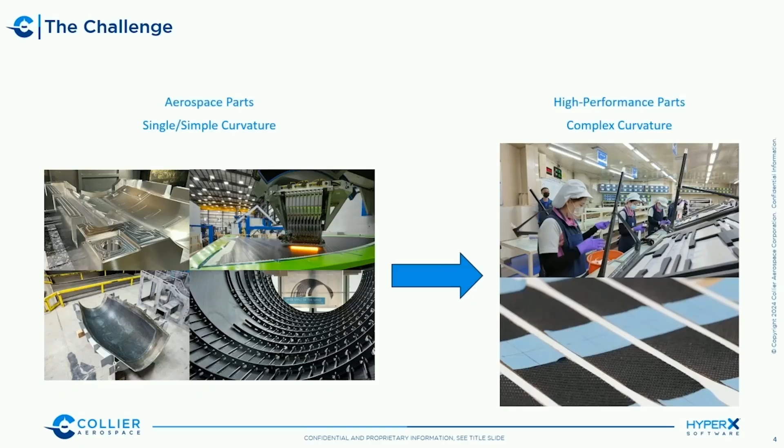Just to lay the groundwork on why we're integrating with manufacturability and maybe some of the differences between aerospace applications. To set the stage, there's a little bit of a difference you might see here between aerospace, where you're dealing with large, comparatively simply curved panels that are all tightly controlled with their layup process, their angles and things like that, versus what you can see on the right in those videos. You've got a lot of hand layup going on. You're using very tight curvatures and very localized stiffeners and strength reinforcements.

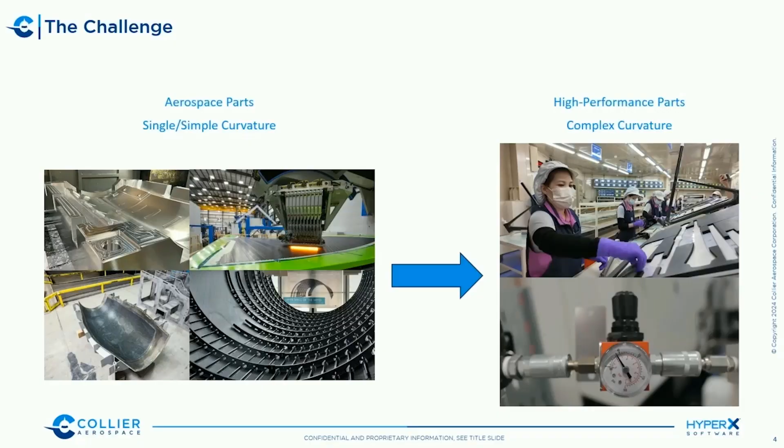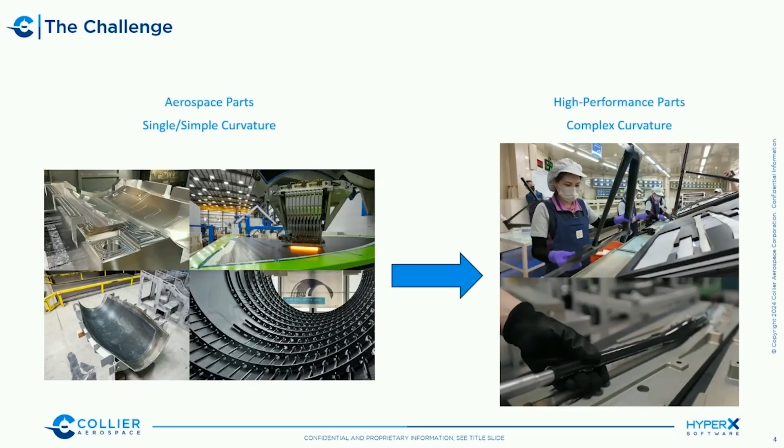So understanding how plies are laid up and how they're positioned over that curvature can affect the performance of that ply pretty significantly, and that's the impetus of incorporating DFM into our analysis workflow. So what I'm going to be focusing on today is how we've been able to leverage HyperX's capabilities and its integration with CAM tools to balance stiffness, strength, and now manufacturability into our optimization workflow to make the best product possible.

So what we are going to be looking into today as the prove-out of this workflow is an integrated bar stem. This is for a road bike, and this has become more ubiquitous in cycling OEMs as they look, one, to reduce part count on bikes, but also to eke out every last gram of aerodynamic drag and weight in a system. So traditionally, they start up on the top right. You can see they're usually two pieces, but that increases overall system complexity, weight, and it's not as aerodynamic.

So they're moving towards what you can see on the bottom, which is a one-piece, what we call a bar stem, which is not without its challenges because it increases overall part complexity from a single standpoint, but it's more efficient from a weight and stiffness perspective.

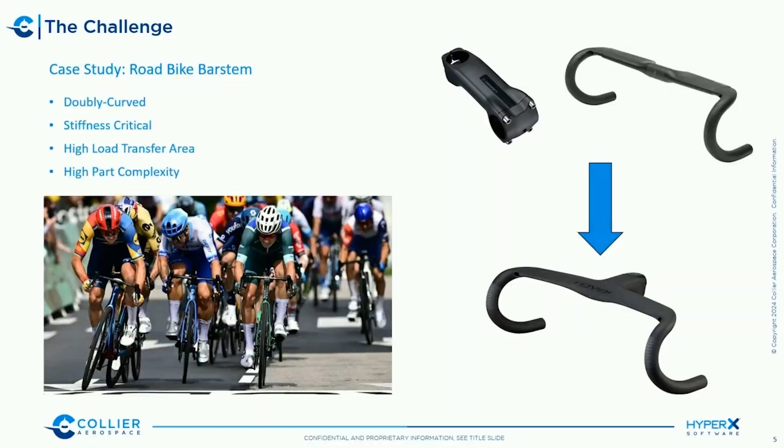A key thing to note here is this is one of the primary contact points for a rider. So from both a load and a stiffness perspective, it can pretty significantly impact their perception of ride handling. You want it to be stiff enough so when they're sprinting at the end of a stage like you see here, or going around a corner at 40 miles an hour, they're not feeling the bike squirm underneath them, but not overly stiff such that their arms and their bodies get fatigued over a full day of racing.

So just to give a high-level overview of some of the non-traditional aerospace applications that we've stretched HyperX's legs in with weight critical or stiffness or highly curved surfaces. You can see on the left, Yvonne showed this yesterday, it's the SP80 sailboat, so a weight critical application with a lot of curved panels that we use to size the hull on.

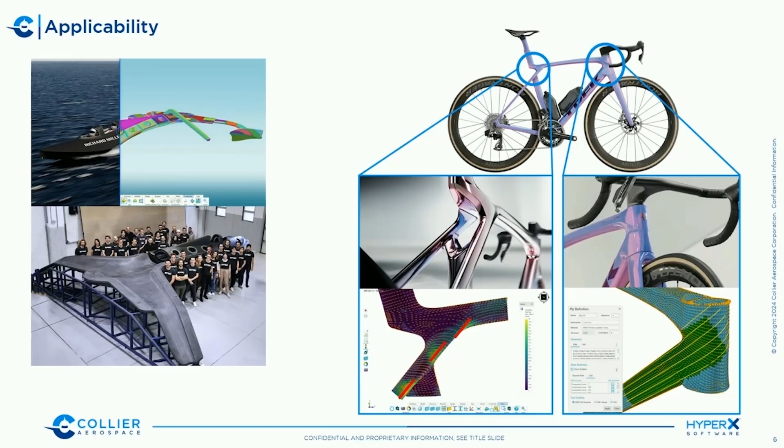And then on the right is the Trek Madone, which you might originally think is just a one stack laminate structure with tubes, but the more you look at it, the more complex it gets. So that's what I'm trying to illustrate there. You can see on the left, there's some instances where we have as many as 7 different tubes joining in an intersection at one point.

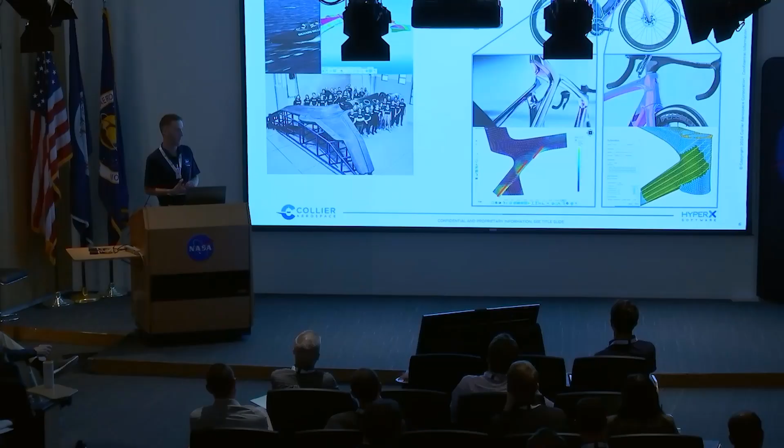Those all have unique fiber reference orientation directions. You might have global plies that span different sections that have different material reference orientations, like you can see on the right. You've got a single ply that spans 2 of those tubes. So you've got to deal with how you resolve those discontinuous material reference orientations, how you deal with drapability and

things like that. So just to show how complex the problem can get and what we're going to be working on. So even though what I'm showing today is just a road bike handlebar, the applicability is that it can be scaled up much more beyond that.

So just to level set where we're at in terms of how sensitive we are to weight. I know a lot of the presentations over the course of the last 2 days, we've been talking about hundreds or even thousands of pounds. And so I did a quick calculation. Like the nose cone, just printing out the 150 pages of stress reports, that's probably about the weight of a bike frame. So we're about 500 to 1,000 grams. So in this case, taking out increments of paper clips is a big deal of weight to take out of this structure.

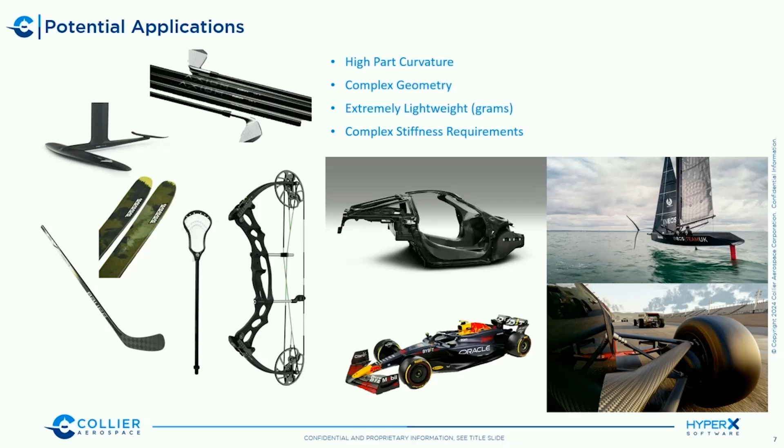So there's a lot of applications for very weight sensitive, complex curvature, especially in the sporting goods industry, whether we're looking at hockey sticks, bows, or even stiffness constraints in auto sports like F1 or SailGP.

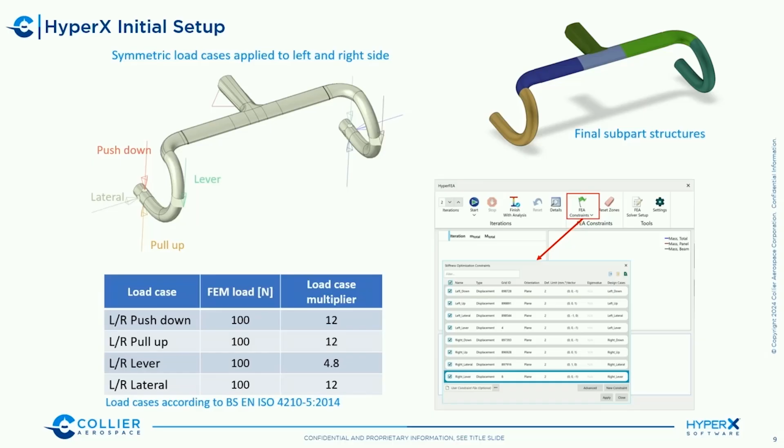As far as load cases, we've got both stiffness and strength cases to simulate both ISO standard strength cases, and then a lot of the stiffness, like I was talking about, is very critical for rider perception in the end. So let's talk about the workflow. There is a lot going on here, but we're only going to look at one of these.

The key point I wanted to make here, in this diagram, the blue is feed forward, the gray is feed back, and each one of these workflows in a general composites application sense has its own use case for designing performant laminates. And so what we're going to be looking at today is this orange workflow.

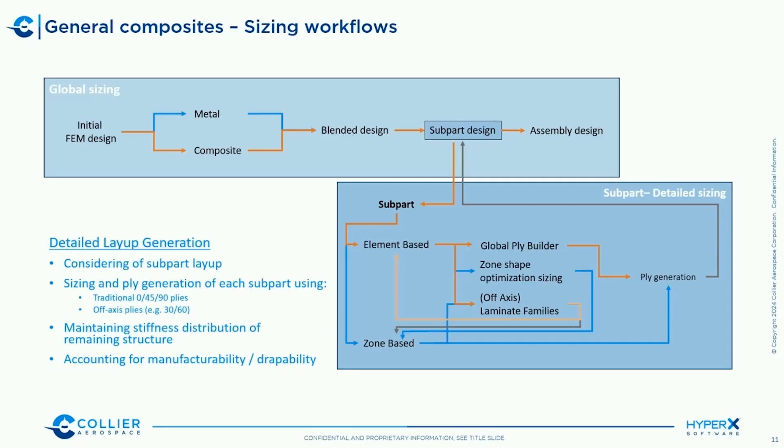And what I want to emphasize is we're going to start at a global level. So from a whole bar stem perspective, we're going to look at composite element optimization to get piecewise stiffness and strength contributions of each of those different structures that I just mentioned. And then we're going to break it out into subpart designs.

So once we do that, traditionally we would use a global ply builder approach. That's a ply-based approach. If you were here last time, you might remember me emphasizing the whole part is the design space, so we can drop plies however and wherever we want within reason. So that's why we're going with an initial ply-based approach.

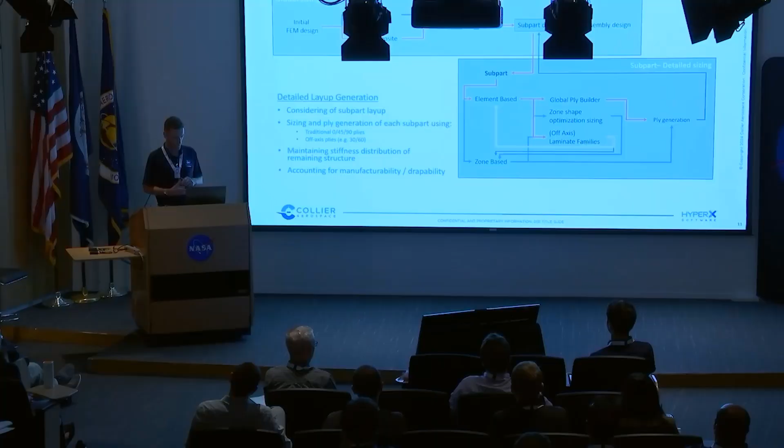But what we're going to discuss today that deviates from that traditional approach is the use of off-axis plies to aid in manufacturability. And so that's going to differ a little bit from what we're typically doing, to develop a new optimization workflow for those manufacturability considerations.

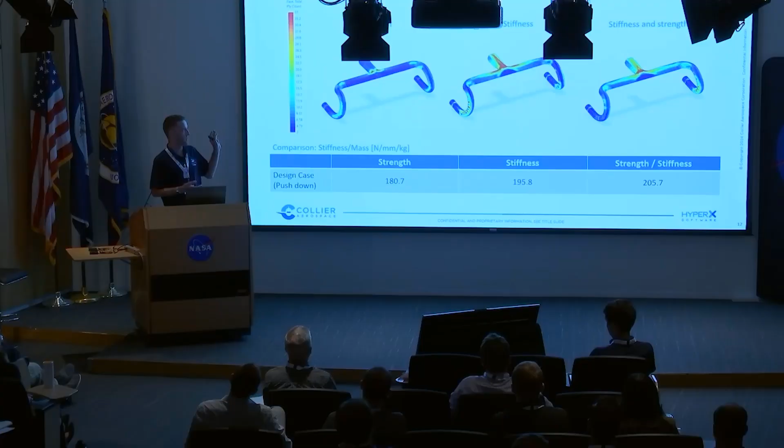So to give an initial overview of those global optimization results, you can see here this is just ply distribution if we consider just stiffness, if we just consider strength, and then the combined load case. And the number on the bottom is a relative performance metric, normalized, and higher is better.

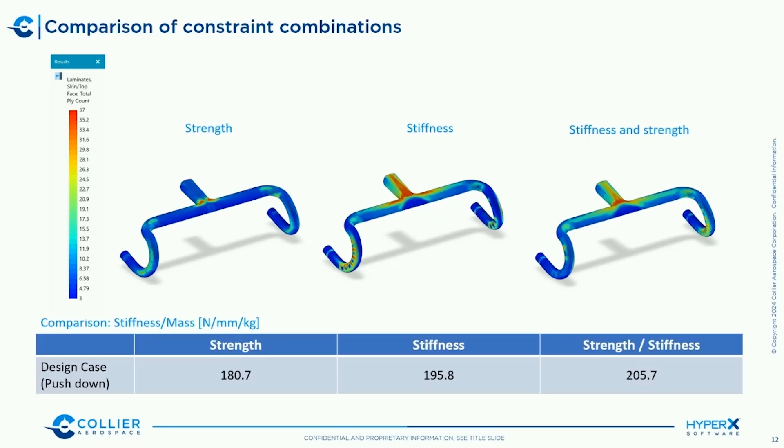So this is just showing if you consider just stiffness or just strength independently, it's not as optimal of a solution if you end up trying to go back and add plies to recover stiffness or add plies to hit strength targets. So emphasizing that it's both a strength and stiffness driven problem. And so we used HyperFEA pretty extensively in the end.

Today, I'm going to focus on just the drop subpart. That's one of the structures. It's doubly curved, very stiffness critical, and so a good example of this workflow.

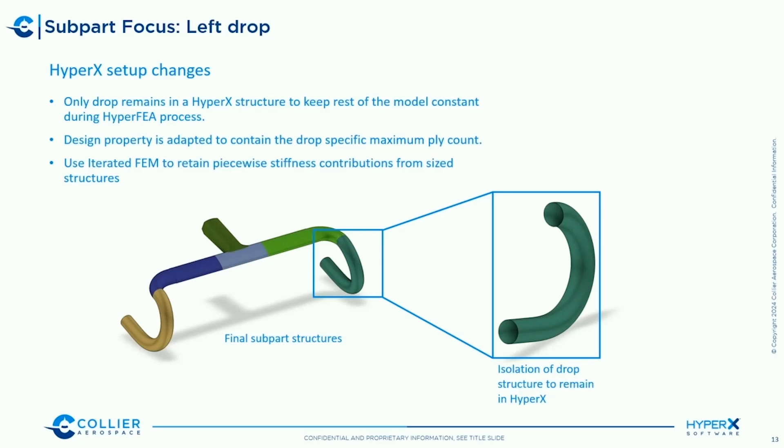So to talk about how we're balancing manufacturability with analysis, we're using an iterative workflow with CATIA in this case. You can also do it with FiberSim like August showed yesterday. And we're leveraging those integrations with CAM tools in order to take into account ply drapability and things like that with our analysis, to have traceability all the way from our computers down to the manufacturing floor while we're doing this analysis.

So this is a high-level roadmap of how this process works. The blue is actions that we're going to take within each software program, and the green is outputs that feed forward into the next step, which is why it's pointing to the arrows. So you start out with HyperX like you would with traditional part sizing. From that, you can generate your laminate families. You can generate virtual ply boundaries that you can then export into CATIA with ply sequencing information to do your producibility studies.

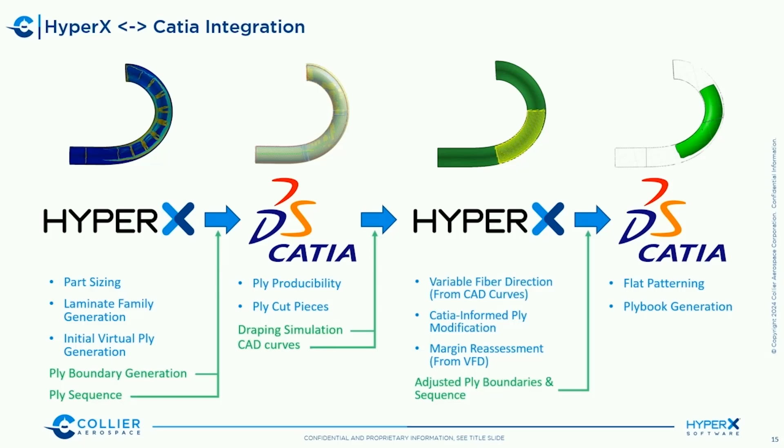You can take those producibility study results, whether it's a draping simulation, we can export CAD curves in CATIA and bring those into HyperX. And from there, that's how we really take into account the manufacturability story. We can update fiber orientations with as-manufactured intent with variable fiber direction from those CAD curves. We can use the draping simulation results for cut pieces and reassess margins before we export those final design plies back into CATIA, where we can generate a ply book that can be consumed by our vendors.

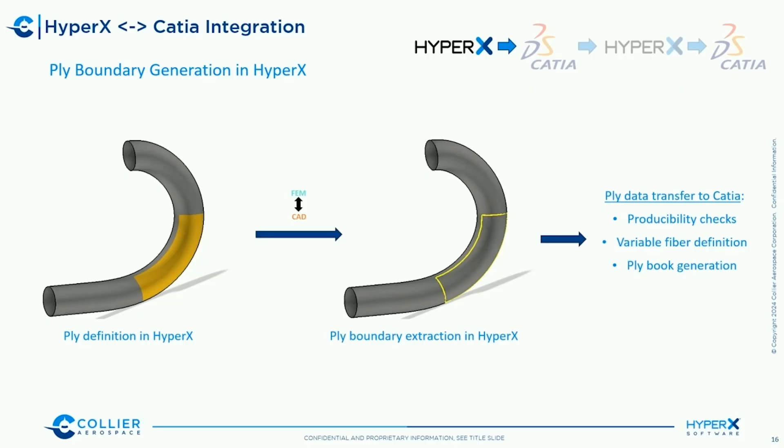So that first step, HyperX can natively export ply boundaries. You can see on the left, that's a cleaned ply, an example of what you would get in Ply Manager in HyperX. And it's really as simple as just hitting the FEM to CAD button in Ply Manager. What that does is generate CAD curves that represent the boundary of the ply that can then be exported into your CAD tool.

If you couple that with the ply table export in Ply Manager, you can take that into CATIA, you can take that into FiberSim, and generate your stack up within your CAD tool. So once you do that, we can run producibility checks, variable fiber definition, and ply book generation.

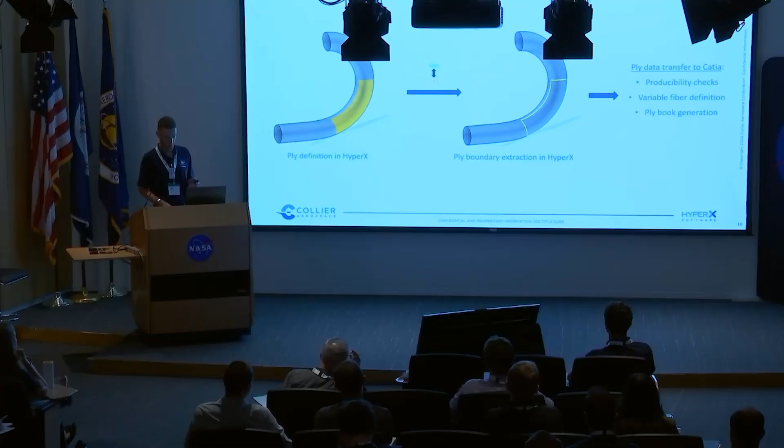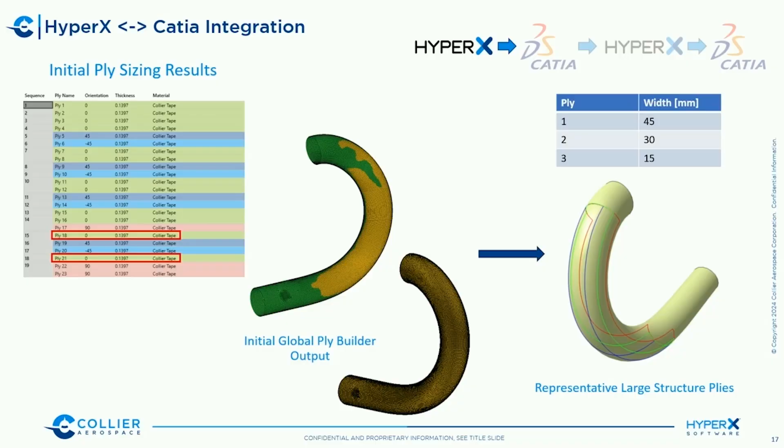And so what we wanted to do here is generate representative large structure plies so we could export those ply boundaries into CATIA to do producibility studies on. That's what you see on the right, those cleaned boundaries. The largest is about a 45 millimeter width, which is relatively representative of what we would see from vendors, where they're doing a clamshell approach to cover the whole structure. And we step down in 15 millimeter increments to get some level of a sensitivity study for those results. So it's the beginning of that balancing act with manufacturability.

And so with those representative ply boundaries, we did a draping simulation with those suggested 0-degree fibers. And what we saw is that what HyperX wanted was not manufacturable with any width of that sensitivity study with the zeros. We're outside of the shearing angle limits, and that was the impetus of needing to go in and suggest off-axis angles. You'd otherwise have to do a bunch of different cut pieces and split this global ply into a lot of very fine, very discrete plies, which adds a lot of part complexity, a lot of weight for ply overlaps, especially when you're dealing with hand layup.

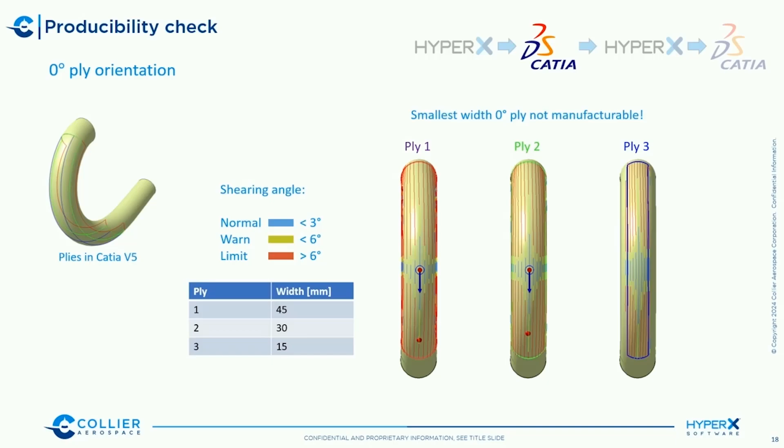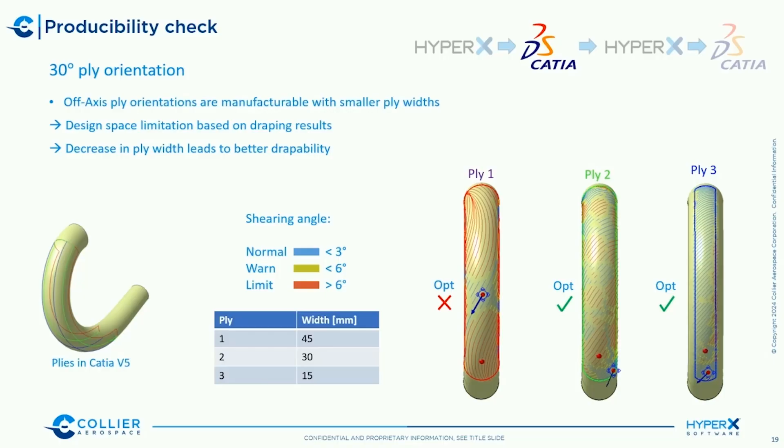So with that in mind, we did the same thing except with an off-axis ply angle. Same boundaries, same shearing angle limits. All we did was change the ply angle to 30. And what we ended up seeing is that in contrast to the zeros, where no width was manufacturable, the intermediate and the smaller widths were showing as manufacturable. So that was the initial promise to prompt us to go into further investigation for finding off-axis angles that we could use to replace those non-manufacturable zeros, and balance that manufacturability aspect while still hitting our stiffness and strength as much as we could.

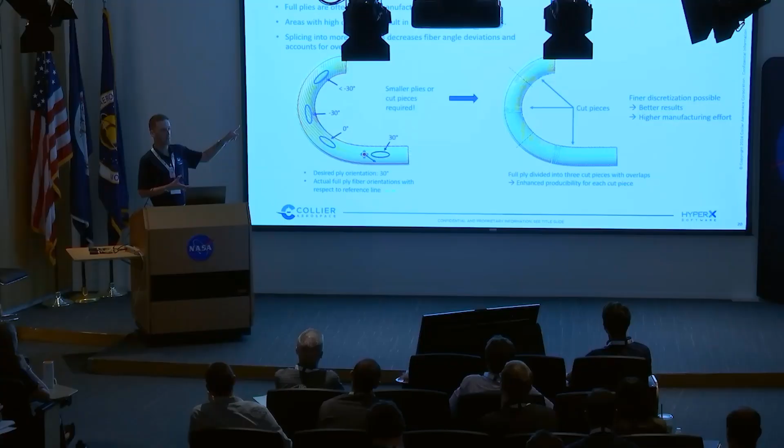Another byproduct that we get out of that drapability analysis is while one of those 30s might show as manufacturable and drapable, what we have to keep in mind is over this complex curvature, there's actually a lot of fiber deviation going on. If we start at the bottom and work our way up with a full cut piece, you can see from the drapability analysis we go from a 30 to a negative 30, so 60 degrees of fiber deviation. So it's a balancing act of minimizing fiber distortion and also minimizing total number of cut pieces. What we settled on was 3 different cut pieces over the length of that part to meet our angle targets and also have a manufacturable part.

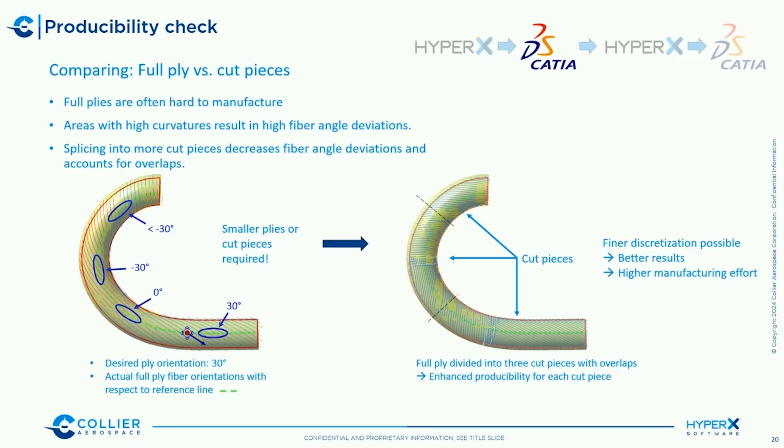So now that we've identified a need for the off-axis plies, how do we go about actually sizing those? Like I mentioned, traditionally we would use Global Ply Builder and HyperX to do that, but those zeros weren't manufacturable, and Global Ply Builder traditionally only works with traditional laminates, 0s, 45s and 90s.

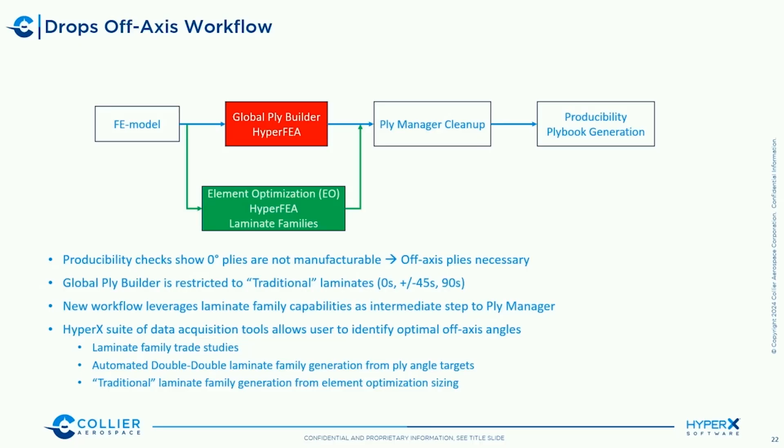So we have developed a new workflow that leverages laminate family capabilities as an intermediate step to Ply Manager. That uses laminate family trade studies and auto-generated laminate families to identify off-axis ply angles. This is the workflow that we followed, starting at the top with a data interrogation from very coarse and working our way down to using automated tools and more refined approaches.

So we start off at the top with data interrogation. We're looking at the initial sizing results: thickness distributions, ply percentages, running loads, bending moments, visually identifying where plies want to be and where those load paths are within the part.

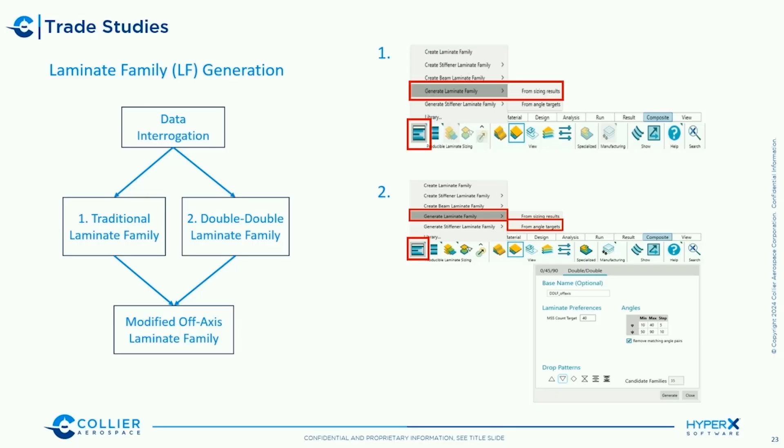Once we've interrogated the model, we can break out into using some of HyperX's automated tools. One is generating traditional laminate families from those sizing results, which you can see in the top right. We can also use the double-double laminate family generator that was discussed yesterday if we want to get relative performance of those off-axis plies pretty quickly.

The end goal at the bottom is a modified off-axis laminate family. So we're identifying the off-axis angles that are most performant and replacing the non-manufacturable zeros in the traditional laminate family with those key off-axis plies.

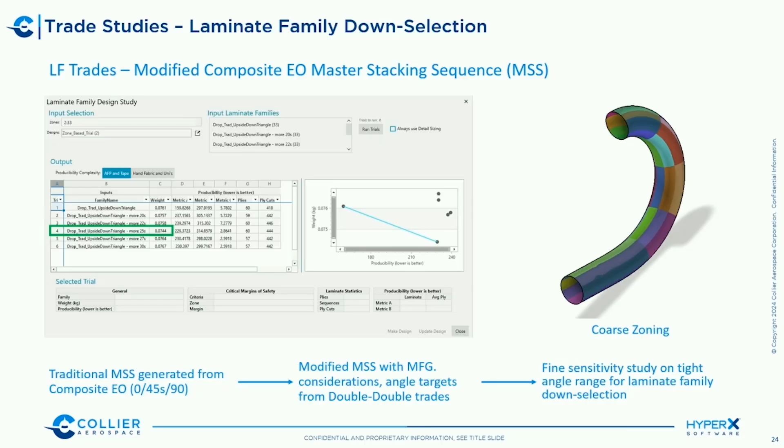This is how we started out. On the right, we had a coarse zoning, just to get relative performance of some of those laminate families. This was informed by drapability that we discussed earlier. We're balancing the need for stiffness to resolve those stiffness constraints with manufacturability. So we honed in on around a 20 to 30 degree off-axis ply angle to meet manufacturability, but still have some confidence in meeting our stiffness constraints.

What you can see on the left is the design study form, which I think you saw a little bit yesterday. This is a quick way to perform rapid sizing iterations and get relative performance in both producibility and mass of these different laminate families. We can see there's an initial standout with this 25 degree off-axis laminate family that had the modified master stacking sequence.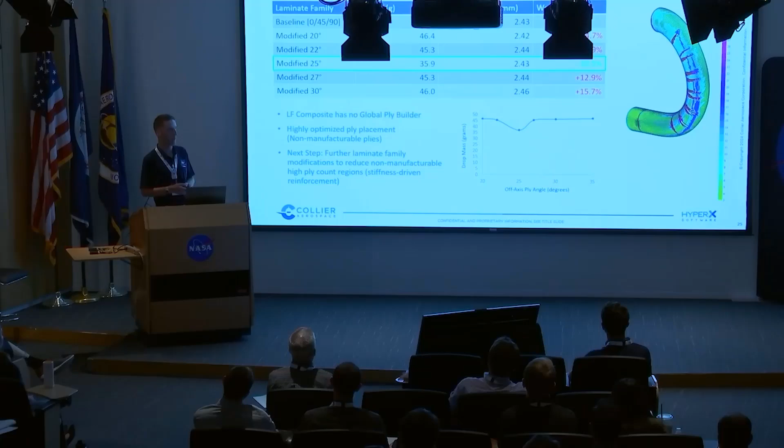From there, we can dive in and perform a more fine analysis using composite element optimization. Once we narrow in on even tighter candidate angles, we wanted to make sure that what we saw in the rapid zone-based sizing still holds true in a more detailed composite element optimization. These results confirm what we saw with the laminate family trade form, that the modified 25 degree off-axis is the most performant.

Again, we're not using Global Ply Builder, we're using composite element optimization. So the result you can see on the right is a highly organic shape. While it's organic, it's still allowing us to optimize with these off-axis plies, even if it requires some cleanup from the analyst at the end.

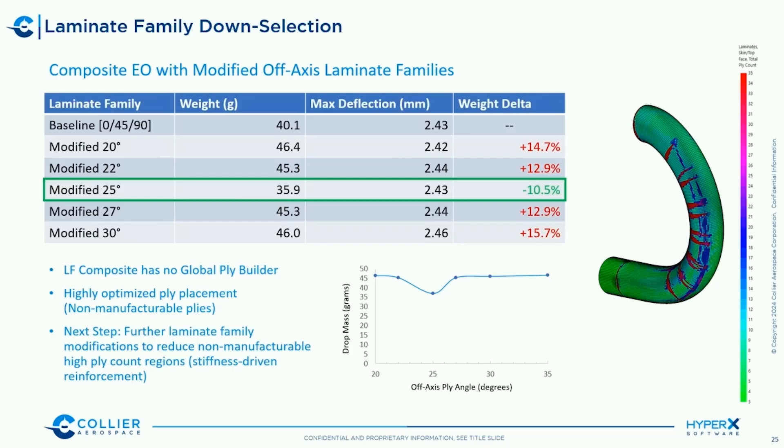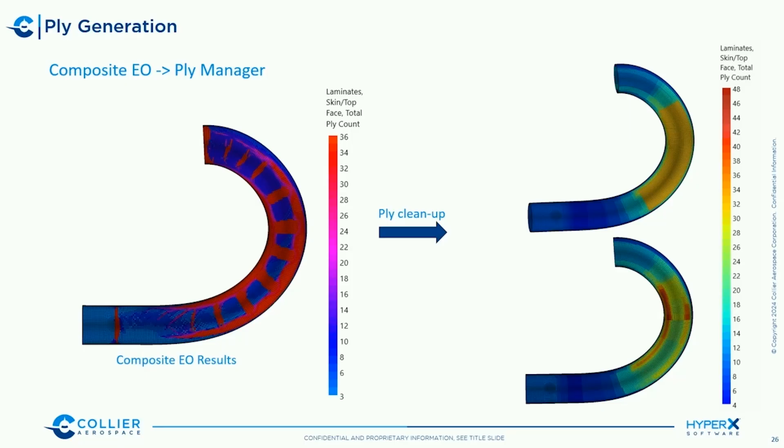So this is what that looks like. HyperX is suggesting localized stiffener ribs, and it's up to us to group those based on initial producibility. We wanted those 3 cut pieces and also to group together those stiffening ribs in order to get a manufacturable ply.

It's also worth noting the data interrogation approach. Even though we can't make full structure zeros, we can still use localized zeros as stiffener reinforcements to meet our stiffness goals more effectively. So we can look at the running loads for our 2 most dominating stiffness cases and use that to design where we place localized 0-degree preforms.

So once we've got all of our plies together, everything cleaned up, and we're happy with the stacking sequences and our margins, this is where manufacturability really comes into play. You can see we've got a representative ply on the left. We're happy with our margins.

Maybe we have a few peaking elements, but we're able to take those exported ply boundaries, like I mentioned, that you can generate in HyperX, do your drapability analysis, and then what you see in that middle image is those CAD curves from the drapability analysis. We can bring that back into HyperX, and we can adjust actual as-manufactured fiber orientation with variable fiber directions. And that's kind of what you see in that blow-up picture.

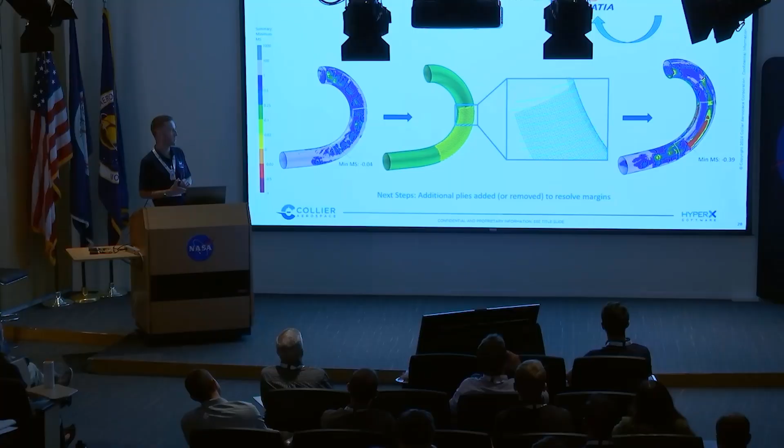So the green are those variable fiber directions or variable fiber curves that we imported from drapability analysis. And then the initial nominal angle for the ply is that black hash mark. And when we update that, we get the teal angle. And so you can see there's pretty significant deviation from as-analyzed. We go from kind of an axial to a more transverse. And when we reanalyze our margins, we can see largely stiffness-driven negative margins.

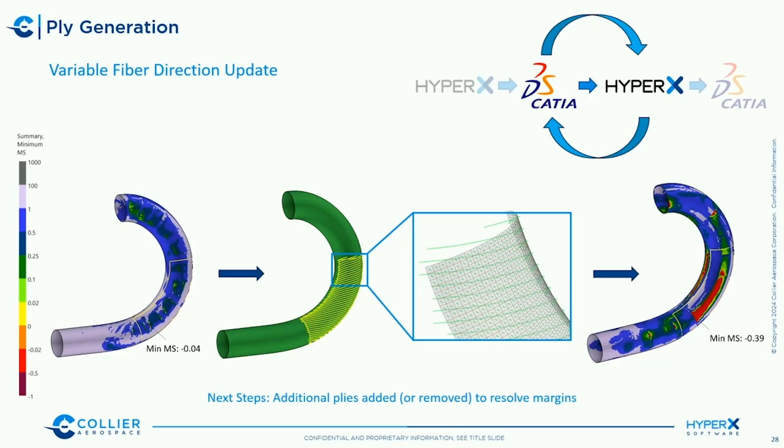But it's important to note here that normally if we would have stopped on the left, we would have missed this entirely. We would have sent that off to the vendor. They would have tried to iterate that on their own and resolve that in a non-efficient manner, but now we can do that in-house. We can catch that early, we can catch that in analysis without even making a physical sample. So we can add plies to meet stiffness requirements. And once we've done that, we can port out the ply sequence, the ply boundaries, and we can generate a consumable ply book for our vendors.

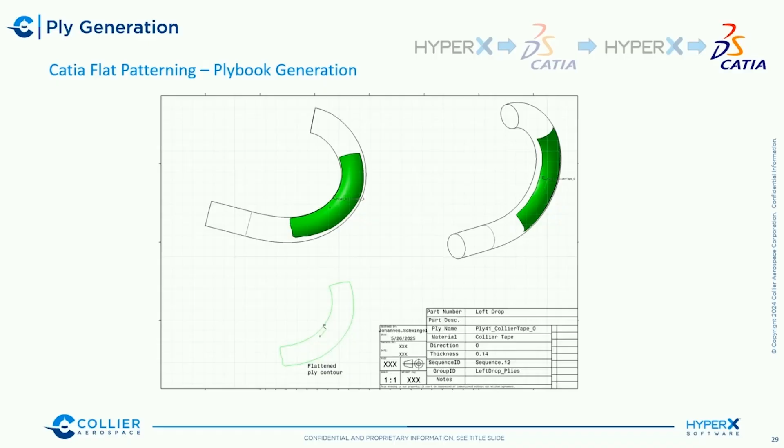So what we end up with overall is a product that's lighter, ahead of schedule, and with a lot of transparency and producibility. Relative to the initial subpart design, we were 10% lighter. We were 2.5% lighter than a traditional laminate design, all while reducing total ply count, so part complexity, by 6%.

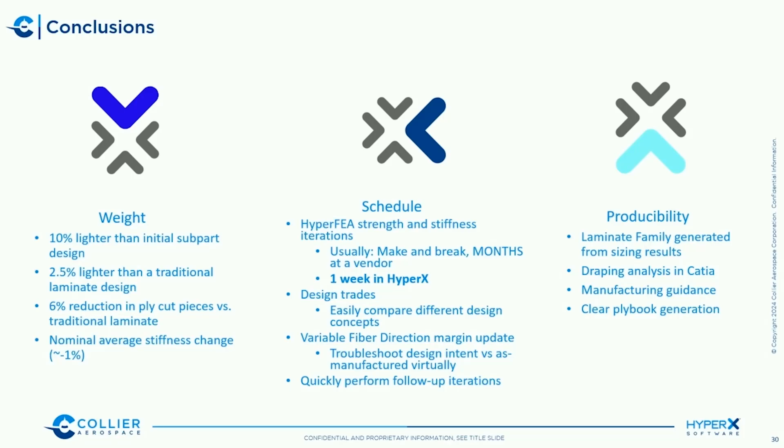As far as schedule goes, we were able to do those coupled stiffness and strength iterations in HyperFEA ahead of time. If we were going to do that at the vendor, it might take months. To resolve those stiffness margins, it was about a week in HyperX. And again, very easy to do design trades and see those manufacturing considerations with variable fiber direction.

And from a producibility standpoint, we can very easily communicate ply books to our vendors for traceability. And we have the ability to make manufacturing recommendations for cut pieces, for drapability, and transparency over the stacking sequence with laminate families. And that's it.

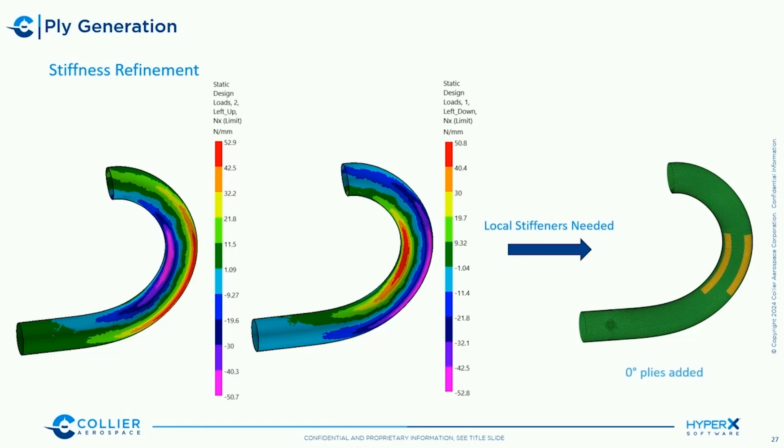You showed in one of the earlier slides that you had a 0-degree stiffness ply that you were just able to add. You do the drapability study to get the variable fiber directions, the real fiber directions. When you add a ply or a zone like that, do you have to redo it, or are you able to take the fiber directions from a previous ply or the ply underneath it and just apply it to that piece? Maybe Johannes could answer that question. He's in the back and he did some of the producibility analysis.

Well, actually, to reduce the effort to apply individual fiber orientations for each individual ply, you can just create reference plies, do the drapability on that, and then use those curves. Because I did a previous project, the handlebar, and you end up with like 400 individual plies. When you apply all those CAD curves, you don't even see the colors of the zones anymore when you zoom out. So reference plies are actually the best way to do that. Great, thank you.

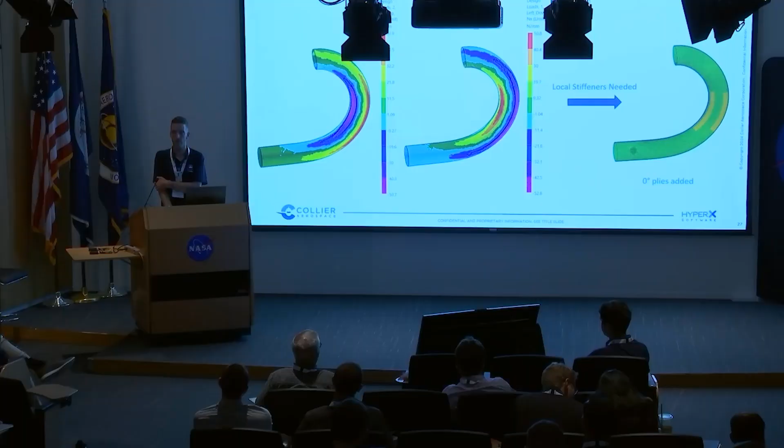So in the end, it was primarily looking at running loads and bending stiffness initially, but more than not, it was the producibility restrictions that informed the initial angle selection that we show here and use the modified main stacking sequence. But to your question, if we had a more refined zone model, that would be where we would see benefits of the double-double. Thank you.